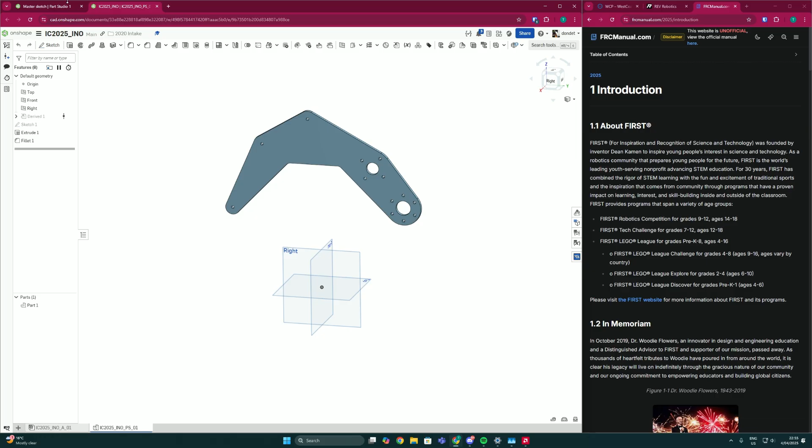Welcome back to another part of the series where we'll be designing a slapdown intake. So far, we've drawn up our master sketch showing where the points of our rollers are going to be. This one's not in the right spot because I moved it at the end of the last part, but that's okay. We also determined where our pivot point is going to be and where our rollers sit when the intake is stowed. Then we drew out the intake plate, the plate that comes out of the robot. Today we'll be drawing the plates that hold the motor that drives the pivot. Let's get right into it.

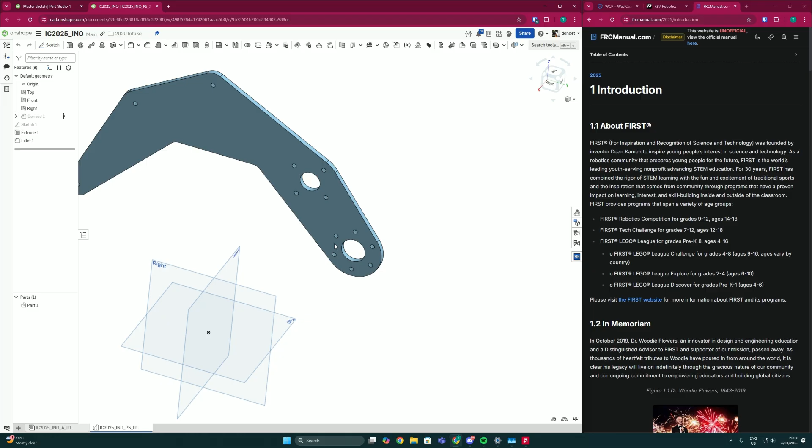The first thing I want to do is draw out my drive base, because the intake plates are going to be driven by a pivot, which is driven by a motor and gearbox mounted onto a drive base. Ideally you'd have drive base CAD where you could just throw it into your part studio, but I don't have that. If you were building a robot during the season, you'd have that, but since we're doing this for the videos, I'm not going to make a full drive base. I could, it wouldn't take too long, but I'll just show you another method that's the same.

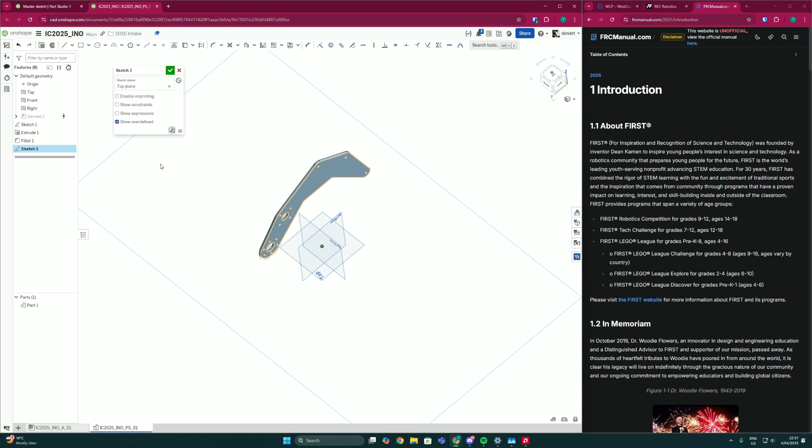So I'm going to start a sketch, and just draw up a drive base in this part studio. I'll start a sketch on the top plane. What I have here is where the plate is relative to the rest of my drive base, and I can use this sketch to base everything else off. Give me a sec. I kind of want to draw out what it's actually going to look like.

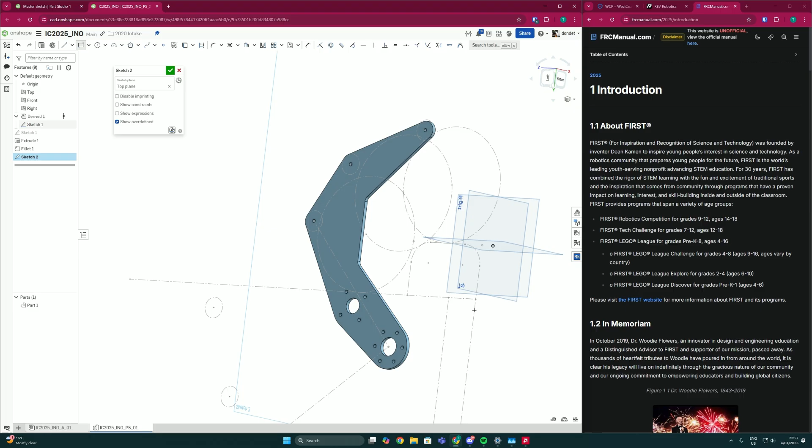Let me think about this. I'll go normal... I can't see anything now. Struggles. I'll go almost normal, and I'm going to draw a big rectangle like this. This rectangle needs to pass through that point there — it's going to be like the front rail. To make it pass through that point, I'll use the coincident constraint, doing line to a dot. Now that's constrained.

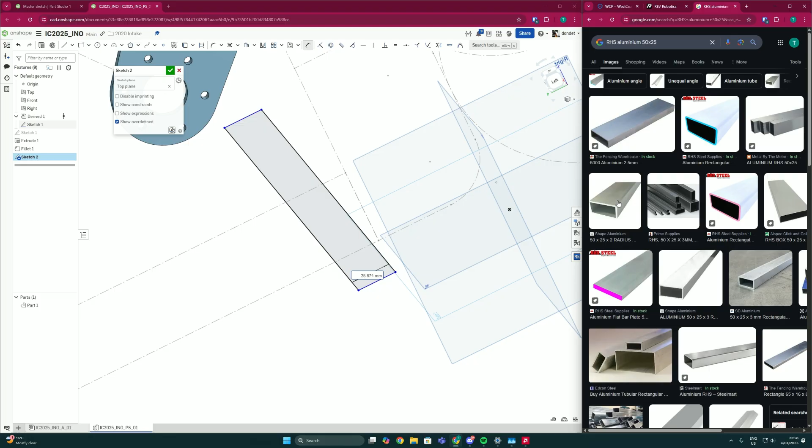Now my drive base rail is going to be rectangular hollow section, RHS aluminium, like this. It's going to be 50 by 25, by 3 millimeters thickness, but I don't really care about that — you'll see why later. It's because I'm not really interfacing with the thickness much, so I'm not going to bother to CAD it. This one doesn't really matter either, because I'll play with the sketch later. This is the distance from the edge of the rail to that plate there.

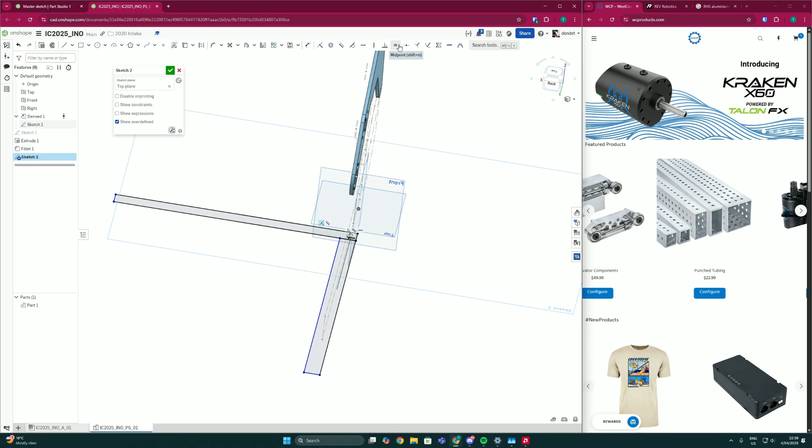I want to draw the rest of the rails, so I'll draw another rectangle, and this one's also going to be 25, so I'll make this equal to that. Now obviously I need a rail here, like every FRC robot has, so instead of drawing another rectangle, I'm just going to draw a center line at that midpoint. You can see if you hover over it, it gives you the midpoint. I'll go normal, and make that a vertical line construction, so I click Q there.

Actually, I'm back, sorry about that. I just wanted to install a program that lets me log my key presses. It shows you my key presses, like that.

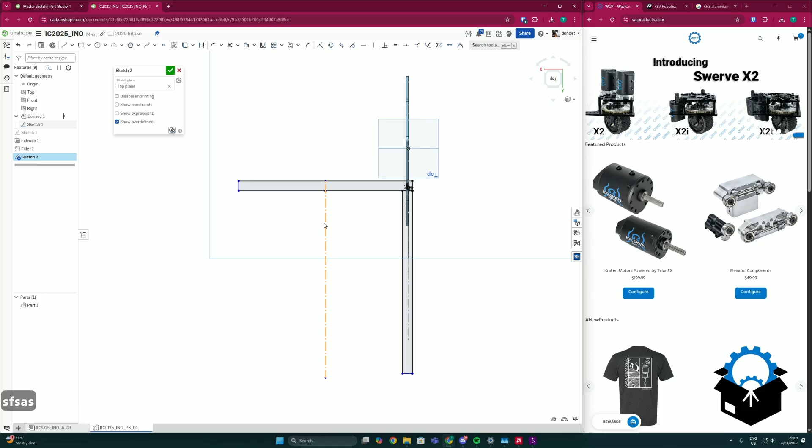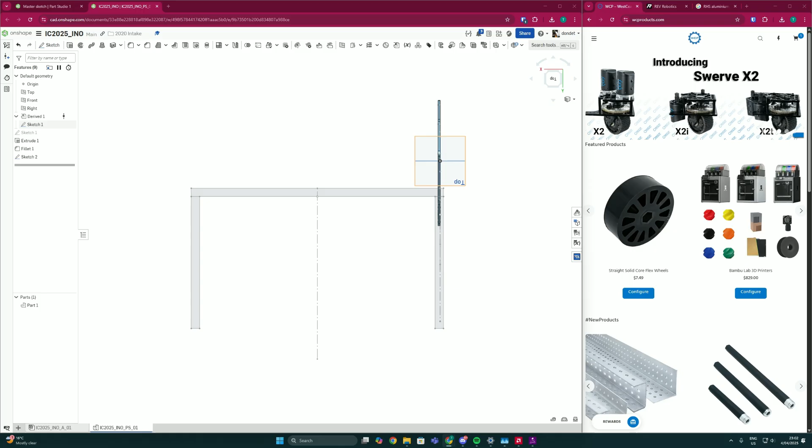So what I was trying to do is make a mirror line. Now that I've done that, I can go mirror, select the mirror line, click on this guy, select entities to be mirrored — 1, 2, 3. Usually we don't really like this blue stuff in our sketch, so I'm just going to constrain as much as I need to. I don't care as much about this blue because it's just the length of it — I'll make it sufficiently long, say 400 should be enough. This one I'll probably do 750, but it really depends robot to robot — your frame size can change. Remember we're drawing the frame out here. Once you've done that, you can extrude that guy out. Remember we said we're doing 25 by 50, so this guy is going to be 50.

Yep, oh wait, I want to do a starting offset because we said the bumpers we're going to figure out, and so is the frame. So 20... oh shit, my bad, this one's supposed to be 20.

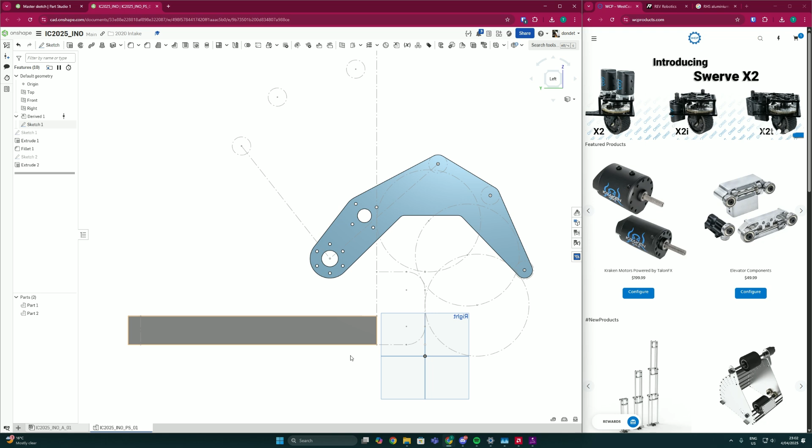Now remember that, just keep in mind your bumpers are probably not going to be this high. Your frame can be whatever height, it really depends on where your wheels are and how you've mounted your frame. But your bumpers should be as low as possible, and that gives you several advantages. One is a lower center of gravity, since your bumpers weigh something, lowering them lowers your center of gravity. You can accelerate faster because you won't tip if you accelerate quickly. Also, it's harder for game pieces and objects on the field to get stuck under your robot, so it's always best to lower your bumpers.

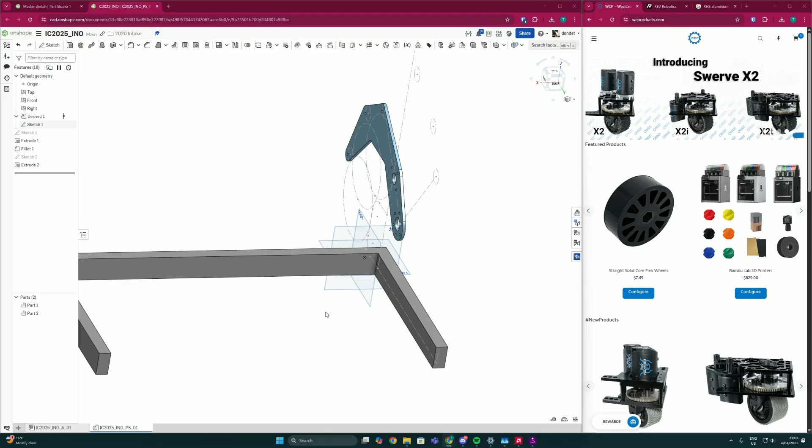Now we'll have to draw the swerve modules in the corners. So how do we know the dimensions of a swerve module? I'm going to create a new part studio and insert an MK4i, this is the swerve module we have. MK CAD... okay, MK4i, perfect.

I'll insert it, and what I'm going to do is create a sketch on top of it and find out its dimensions. I just want to know its width, length, and height, so I can do a rough sketch in my other part studio.

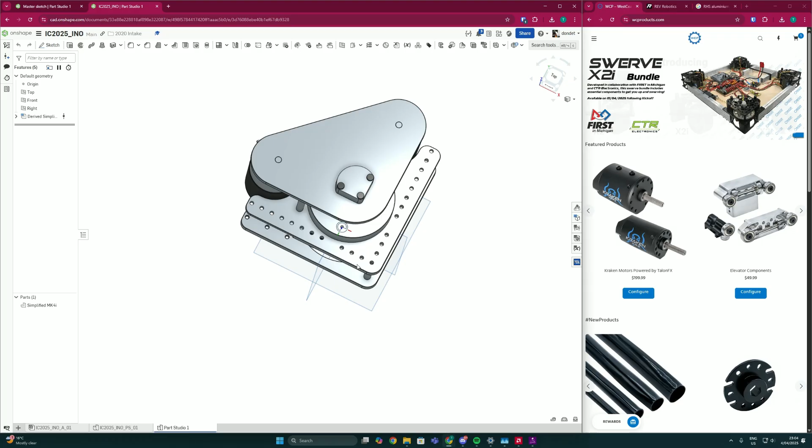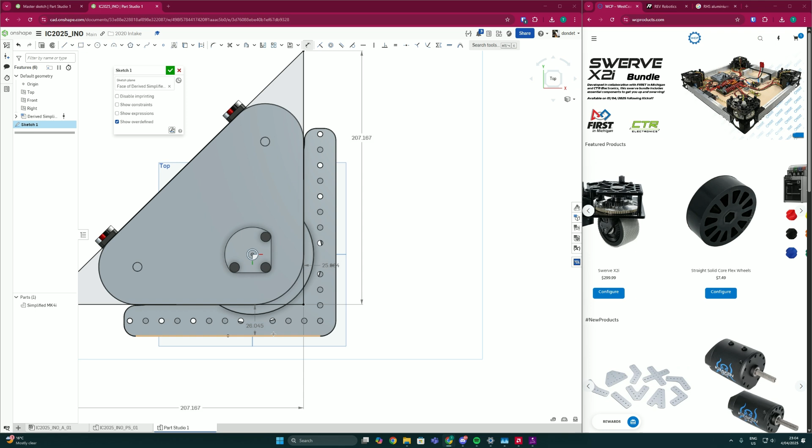So I'll start a sketch here, pairing sketch normal to the plane, like this, and like this. I'll click I for coincidence, and bang, bang. I probably also want to know this distance. I'm drawing all this so that when I have everything attached in the assembly to the intake, I can tell whether it's going to hit something, and we can move stuff around. That's why we have CAD, because we want to know if there's going to be any collisions later.

I'll just make them both 26, could be rough. So, got that. What did we say? Forgot... 207.167, okay, 207.167. So I'm going to draw a sketch on this.

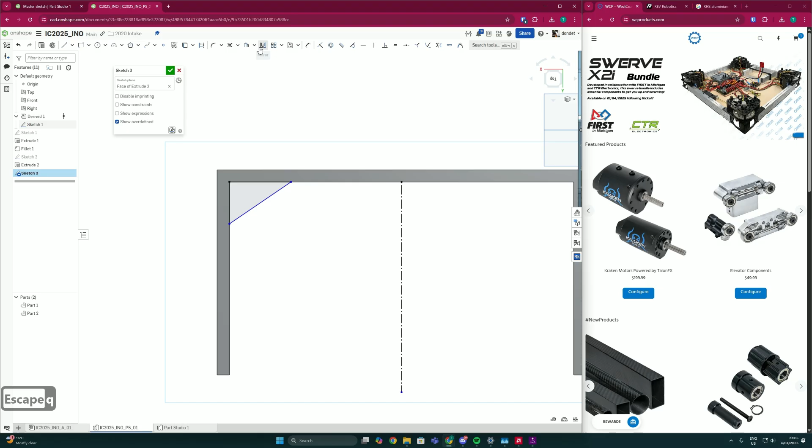Just draw a quick triangle like that, mirror line like we did before. Mirror... oh oops, select the mirror line. Bang, bang, bang, okay, and I forgot it already, 207.167. Make those two equal. Oh wait, god damn it.

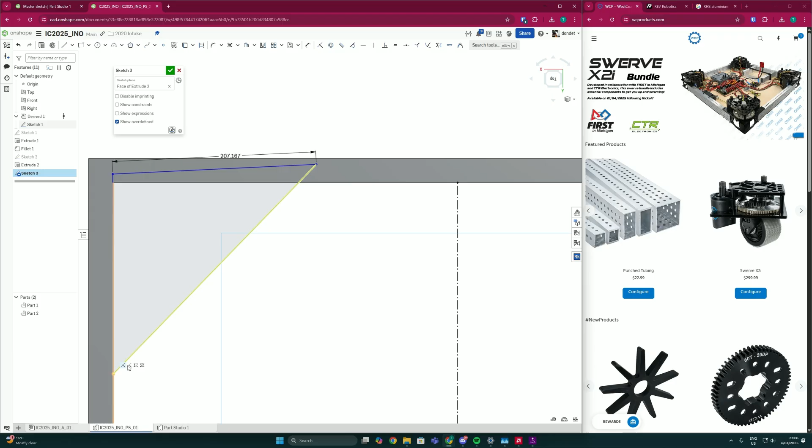That was not the correct thing to do, because I wanted to have this a little bit off the line, like there, right, same with this one. So I'm just going to delete those constraints, get that one there. Oh, that's not what I wanted to delete at all. Not what I want, okay, I'll just do this.

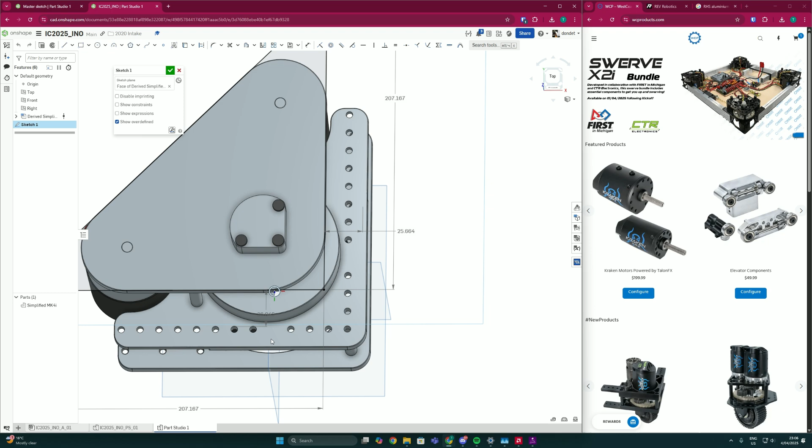Something like that, right? Make these two equal if I haven't already. I'm going to make this parallel to that, and this parallel to that. And we said this distance is 26, and this distance is 26. Is that right? I might... yeah, whatever, okay.

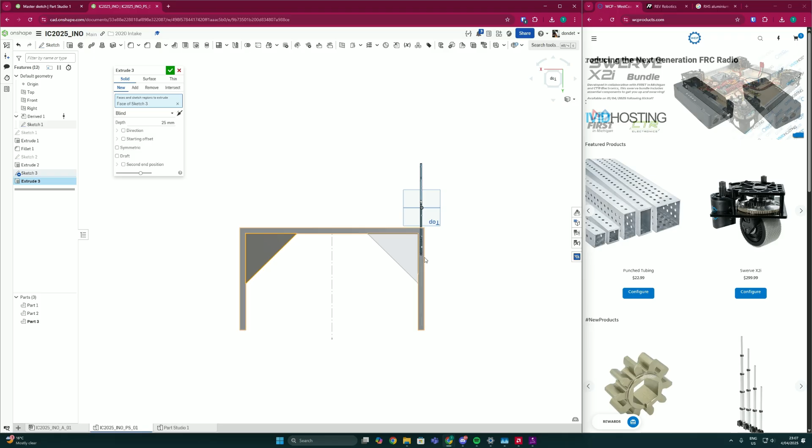Actually, I'll make it 25 so it combines with the rest of the drive base, otherwise it'd be floating, which would be a bit annoying. And then I want to know the height of it. Oops, the height of it is that, so why do I keep doing that? I'll extrude it up by that height. Now we have something that kind of represents the swerve modules, so that's good.

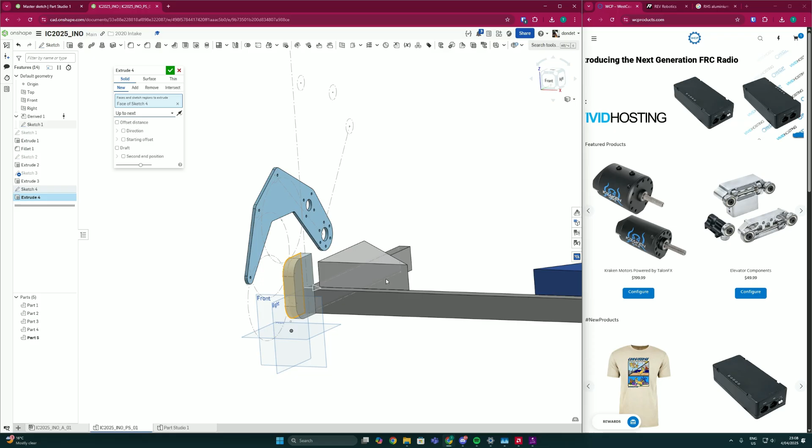Okay, now we probably want to do the bumpers. So I'll sketch this face, and I'm going to click U to project the sketch, and bring this up. This represents my bumpers, if you remember from the master sketch. I don't want to do that, I'll just draw a new line. Perfect, so then I can extrude this out all the way up to face, not up to next. I can click on this face, I'm going to make a new one. Yeah, blue bumpers, nice, looks good.

Sick, what's next? I probably want to do the holes. So in order to do the holes that are on the drive base rails that you can mount things to, they are always 12.5 mil away from any edge.

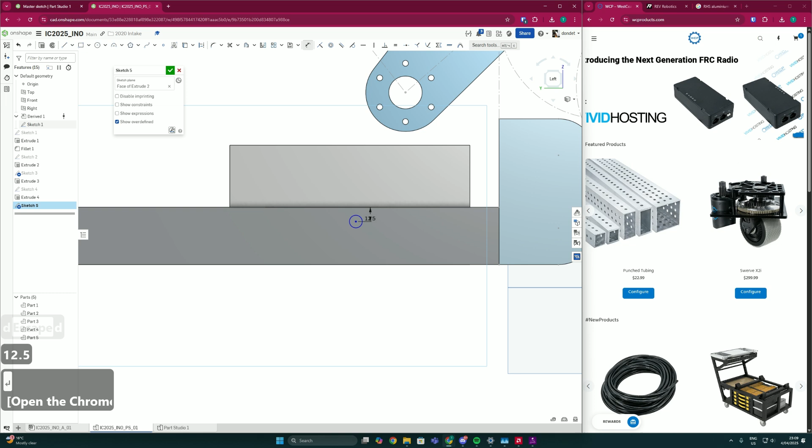There's a gap in the swerve module, right? There's not going to be any holes here in the corner. So I did write down somewhere how much that gap actually is. I've written down that it's going to be 119.8 - don't ask me how I got that number, I don't remember. You won't have to do this because you'll have the actual CAD, your real thing.

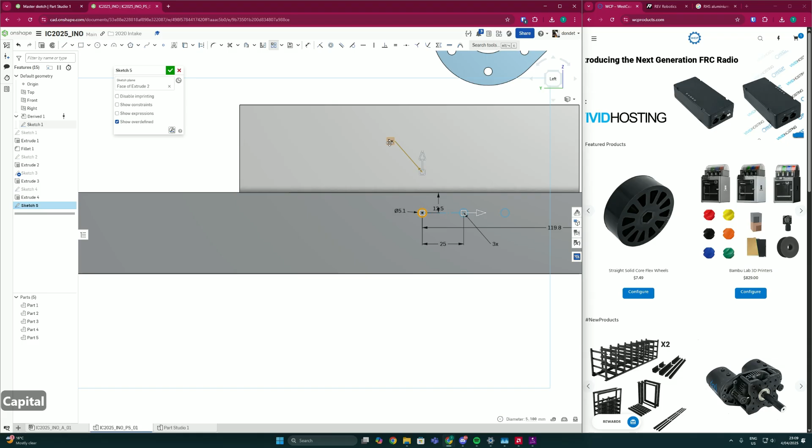Linear pattern, 3 of them. Linear pattern means you can create multiple instances of sketch entities uniformly in one or two linear directions. I'm going a bit quick because this part isn't so relevant to the intake, and I want to keep the video relatively short. But that's exactly what we want, because we want kind of like a grid of holes.

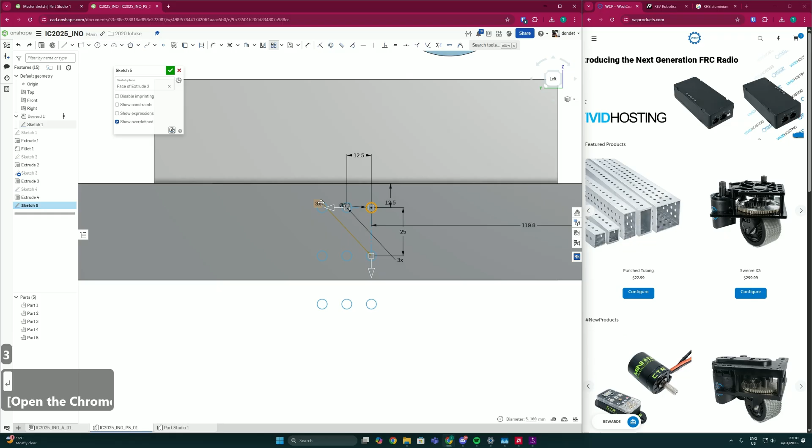We said 12.5 spacing, and I'm going to make 3 rows. I'm about to do 20 of them - is that enough? Let's go for 24. Yeah, that's probably enough.

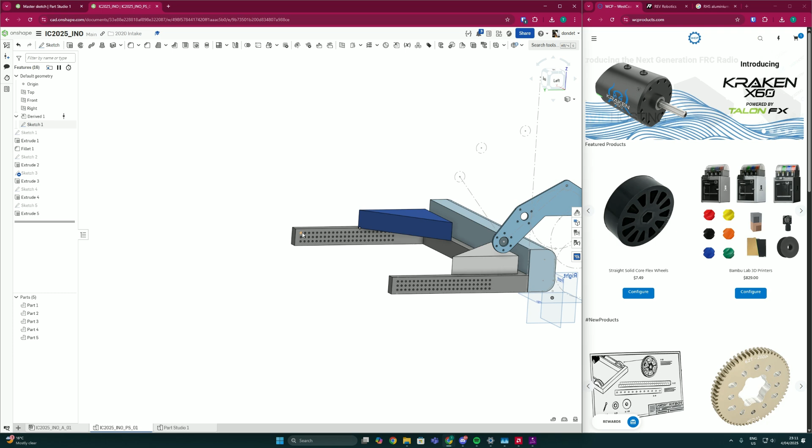I'm going to remove everything in that sketch. I can click on the sketch to select all of the faces, all of the closed contours in that sketch. And I'll do through all, so it goes all the way through the other side. So now we've got our drive base frame done up with all the holes. Kind of represents what our real drive base is almost going to look like - a very rough version of it at least.

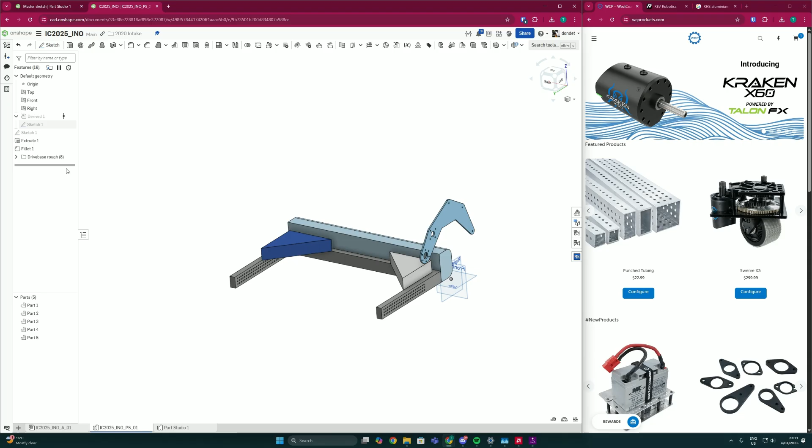Now that I've done that, I'm going to hide the sketch that's visible because I don't want to see that, and I'm also going to put anything related to the drive base into a folder. So anything up until sketch 2 - I just held down shift to select them all. I'll call it drive base rough. You can click add sketch to folder and add them to a folder like that. So now it's much more clean here for things I probably won't ever touch again.

So now what I will do is start the sketch of the pivot plate, the plate that drives my gearbox - I mean my pivot, the gearbox that drives my pivot. I started a sketch on this face because it's going to be directly mounted to that box tube, and I'm going to click N to go normal.

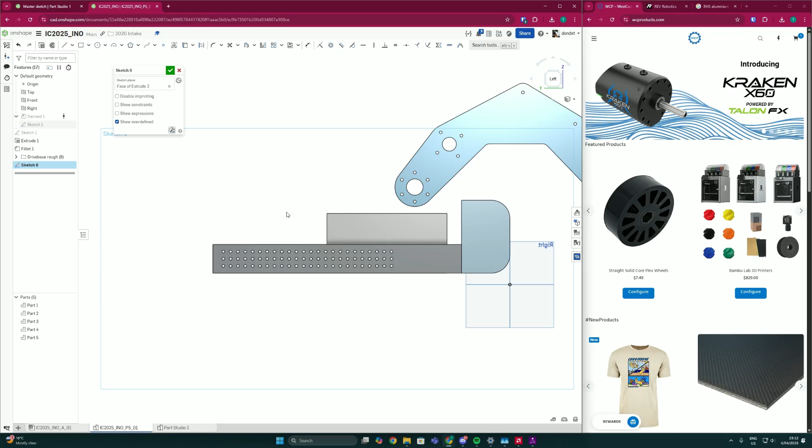Like we did with the intake, we need to figure out where all of our holes need to be before we sketch the perimeter of this gearbox plate. So the first thing we need to do is find out what the ratio of our gearbox is going to be that will drive this pivot. The way we do that is we go into Recalc - we love Recalc, and Recalc has an arm calculator. So we'll go to here. We'll be driving it with one Neo Vortex.

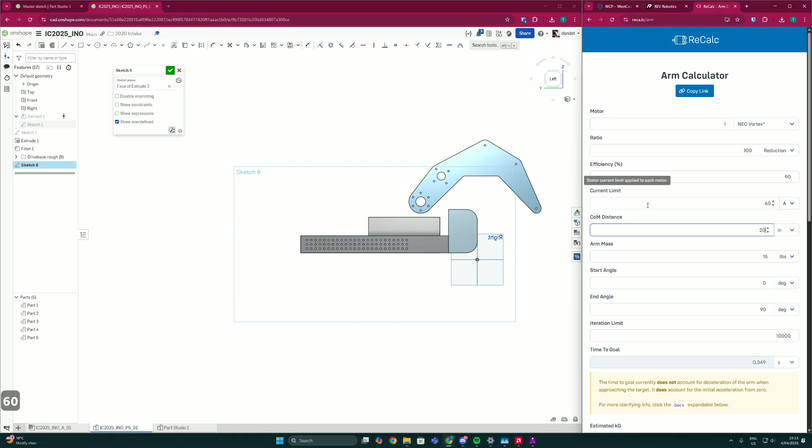Typically all you need. The ratio we don't know just yet, so I'm going to leave this for now. The efficiency - well, the more gears and pulleys and chains you have, the more your efficiency goes down, because there's no energy transfer that's actually 100% efficient. This isn't realistic, so I'm going to put this at 90 to compensate for any energy loss, such as loss to friction, to sound in our gears and chain. Our current limit, I think we can up that a bit to 60 amps. We can talk about how you decide on a current limit in a future day - I'm not going to get into that now.

My center of mass distance - in order to figure out whether the motor can drive this arm, you need to know how heavy the arm is going to be and where that mass is centrally located. So the first thing I'm going to do is go to metric, kilogram, and I'm probably just going to want to calculate the distance between these two holes.

What do you mean? That's kind of annoying. Okay, the center distance is 333. Now that's not actually going to be the real center distance, because what I'm really looking for is where the center of mass of the whole intake is. If you think about all the wheels and pulleys, it's probably going to be somewhere around here. We can only really know once we've assembled it, but there are functions in CAD you can use to check around where the center of mass is going to be. It's not 100% accurate because there's other stuff you add on, but it's pretty good for a rough sense. Regardless, because the motor is back here, it's going to pull it back a bit.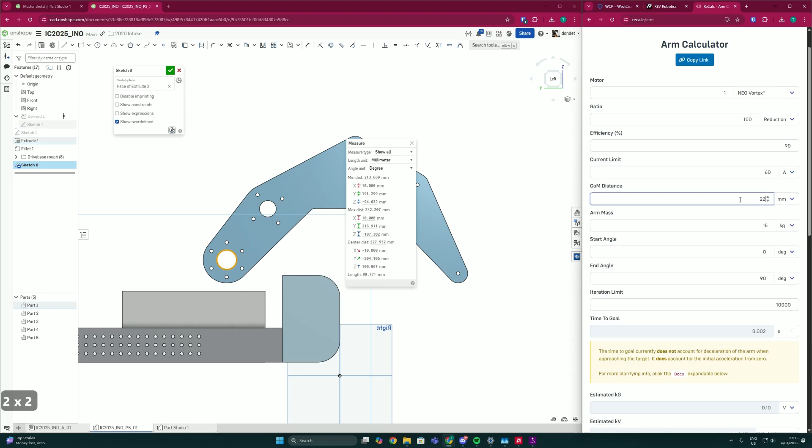I'm going to just put the center of mass there for now. Actually, let me click on these instead. Min distance, that's not really what I want. I want the center distance, 227... 228 actually. My arm mass, I don't know exactly, you can kind of figure this out in CAD to get a rough value, but I'm just going to go for 3 kilos.

Now that I've got that, I need to know how much I'm swinging, so that's what we made our master sketch for. We found this dimension, which is 85.831. So we'll put this in.

85.831. And now I'm just going to bring this down, and as you can see, as you bring it down, the speed goes up. So I'm going to try 50. Speed's at 0.18. At some point you bottom out and reach kind of a minimum time.

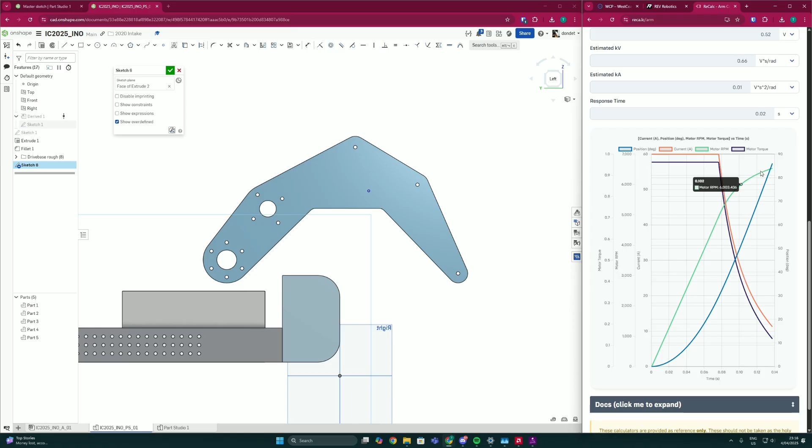If we look at our graph, we'll be pulling 60 amps for about 0.08 seconds, and then it'll have reached... is it reaching max speed, or is it just, okay, don't worry about it. Regardless, we're going to go for a 40 to 1 reduction. That seems good, I'm going to delete that point. So with a 40 to 1 reduction, we should get the intake coming in and out in 0.13 seconds. I think that's fast enough, should be fast enough. If it's not, we can have a look at it once we've built it.

But let's talk about how we're going to get that reduction. Right now we're using chain to drive that pulley, that pivot. I think I mentioned that in the last video, and the reason we use chain is because it's very good at shock loading, in the sense that this intake is sitting outside of the robot. It can hit the field wall, it can hit other robots, there's a truss that's always somewhere on the field, and if it hits that, it's going to send a shock.

It's going to try to push the intake, move it, put it back into the robot, which could be fine, but if your motor is applying a torque to keep it in that position, that's going to push against the intake hitting into the wall. Because of that, you could end up, for example, if you have a gear driving that pivot, shearing that gear tooth. The gear tooth could break, which is why we use chain, because it's good for shock loads.

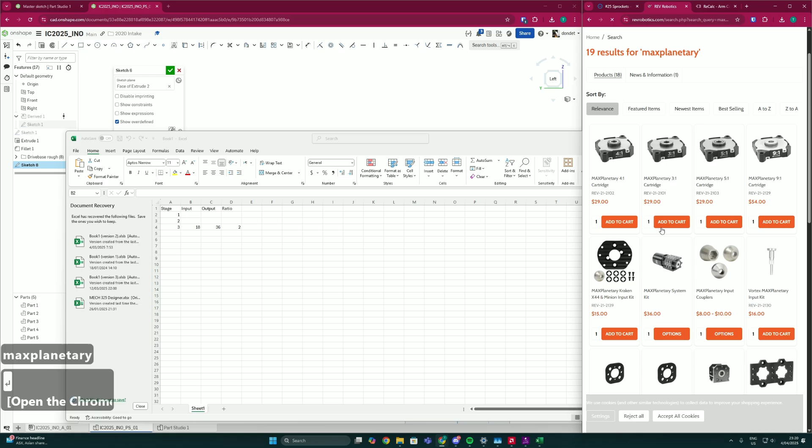So let's use a MAXPlanetary as the input. That's just a planetary gearbox, all packaged up nicely for us. They're really nice to use. I would avoid it if you're looking at some very low backlash solutions, because there's no way you can adjust the backlash inside of this gear cartridge, right? Whereas with a gear that you put on a shaft, you can do multiple things. You can seal it up, you can put retaining compound on it, which is almost like a glue to fill up holes, which should get rid of backlash. You can also put a steel shim in it to shim the shaft between the gear, and that kind of gets rid of the gap, because all our gears are designed to just slide onto shafts. They're not toleranced to be pressed on. They can still move around the shaft, and that brings in backlash. So by putting in the retaining compound or putting in the shim, you remove that backlash, but you can't do that with a gearbox like this. So if you want to make an arm that needs to have really zero backlash, because you need to go to multiple positions, I would try to avoid using this, but otherwise it's quite good.

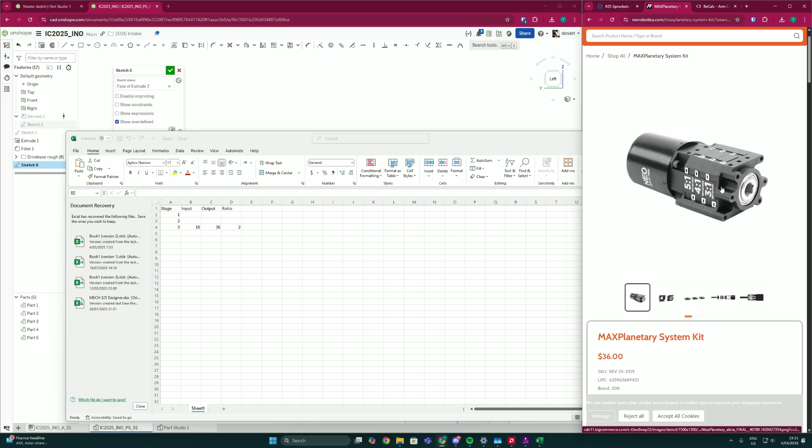So with that, we've got these options for the ratios for the cartridges, right? So ratio here is this divided by that. So the total ratio is going to be this times this times this, right? So right now we have a 10, and we want a 40, so we kind of need a 4 to 1, sorry. So let's say I'm going to use, I'll show you here.

Okay. We need a small gear, we need a big gear. I wouldn't use anything under 22 - wait, that was 3/8. I wouldn't use anything under 20 because this has a high likelihood of shearing. We've had them shear in the past, just from normal use.

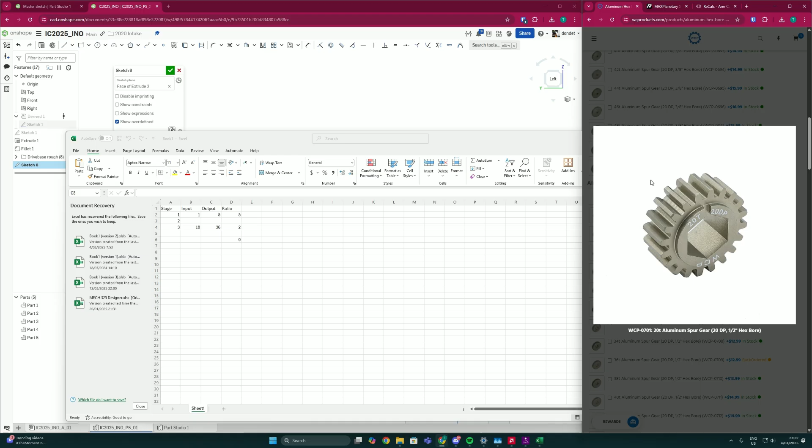Let's go for 20. The smaller the gear, the more likely it might shear. If it does shear, you could add an extra gear, so you have double the surface area, or go to a bigger gear, or go to a steel gear, which I don't think they sell. Oh wait, they do. You could go to a steel gear, but it's more heavy, which is why we tend not to use them, right?

Yeah, like this one here. If you did go steel, you could probably even go for a smaller gear because it's a lot stronger than aluminium. Aluminium is just light, which is why we like to use it.

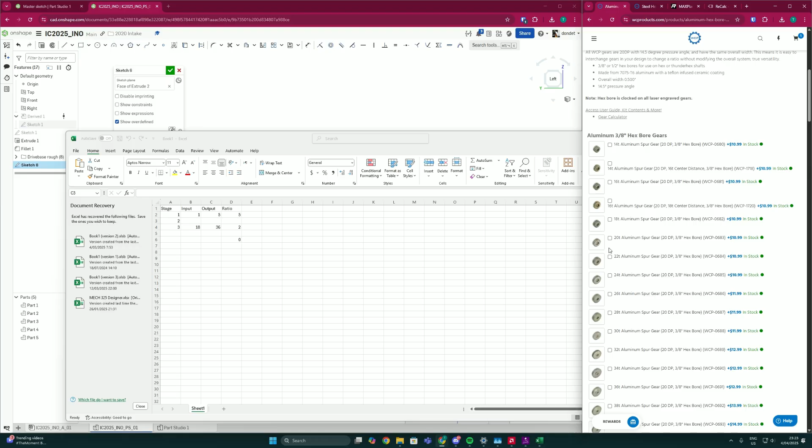So we have 20, and then in order to have a 4:1 ratio there, we probably want... that's an 80 tooth. Don't like it, it's a bit big. So what I'll do, go back here.

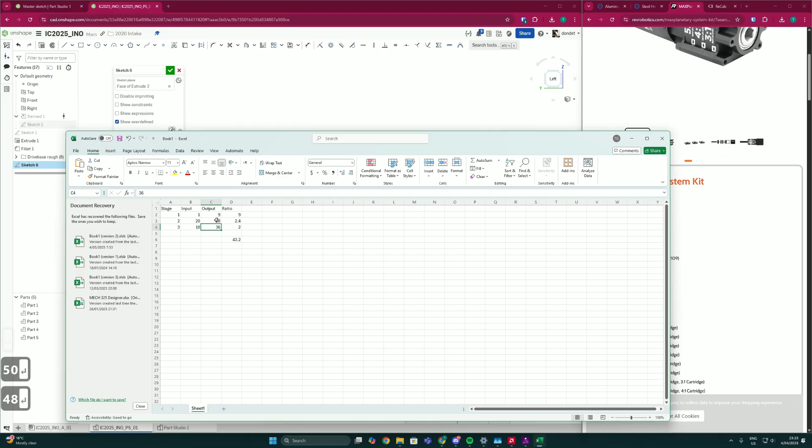We could go for a 9:1, right? Now we have an 18. This divided by this, so yeah it's too much, but we can go to like 50 maybe. Too much - 48, 46, 44. Yeah, that's pretty close to what we want. I'm happy with that. If we put that into ReCalc, 39.6.

Great, so I'm going to copy that and pop that in here, just for future reference if I ever need to look at it.

So that's good. Now we can start to draw up all the holes. Okay.

So first thing we probably want to do is project the holes that we know are going to show up in this plate into our existing sketch. So that hole isn't really going to show up, but there is a bolt that's going to go into here, so we can use that. And I'm going to make that a construction line. Yeah, and...

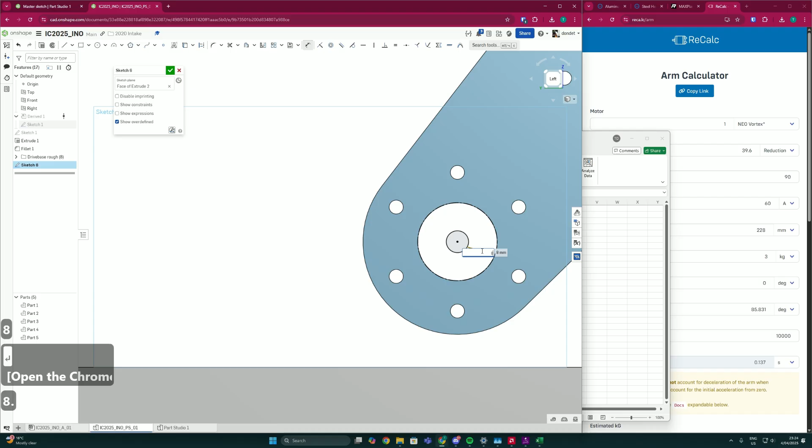I'll put a hole here. Let's make that an 8mm bolt, 8.1 - sorry, because it's clearance. It's going to be a bolt that goes into a hex shaft, and that hex shaft is going to spin in a bearing. Because the sprockets have a bearing size hole. You'll see later.

Yeah, and then what we want is something that represents the 18 tooth sprocket - this guy over here. Now, like we did before, we can go back into... I'll go to this one. We can go back into the sprocket drawings and figure out what the diameter of the sprocket is going to be with the chain, and we can draw that up just so we have a reference diameter that we can avoid.

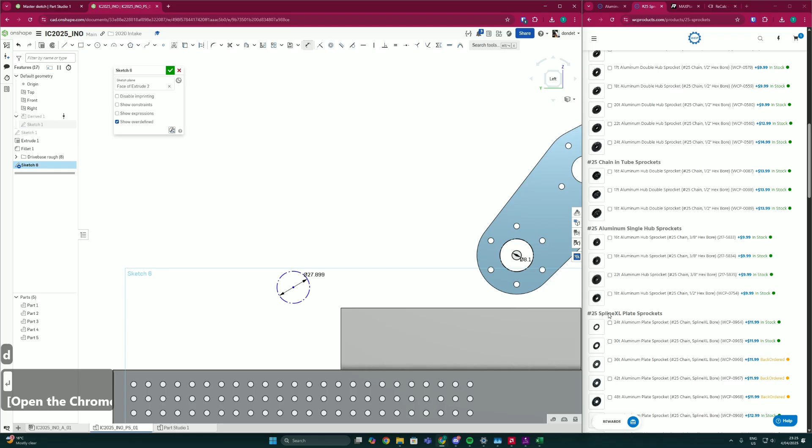Yeah, good enough, I just want the reference diameter. So an 18 tooth has that reference diameter in inches. Yep, so that's cool.

It's going to sit like here, and then we need a bearing bore because that sprocket has a hex hole, so we need kind of like a hex bearing in our plate. It's actually going to be a hole, so we're not going to make that a construction line like we did the other ones.

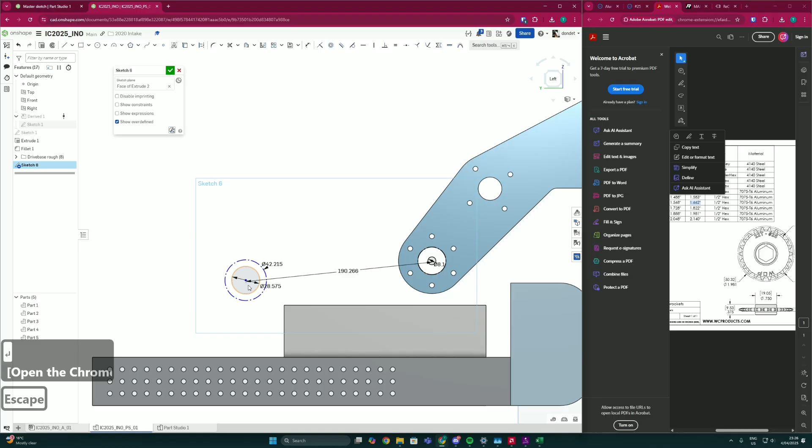This distance here is going to be defined by the number of chain links that we need. The way that you do that is you position this guy around where you want him - so let's say there, and dimension it like that, right?

Now what we can do is we can go into recalc, chain calculator, chain type 25, my desired center in millimeters - it looks like 190.266. I've got an 18 tooth to a 36... so it's suggesting either I can use 86 chain links or I can use 88 chain links.

I'm gonna go with - if I come closer, I'm getting pretty close to the Swerve drive, and I kind of want to avoid it. So I'm gonna go to 192.8175, just to clear the Swerve a little bit more.

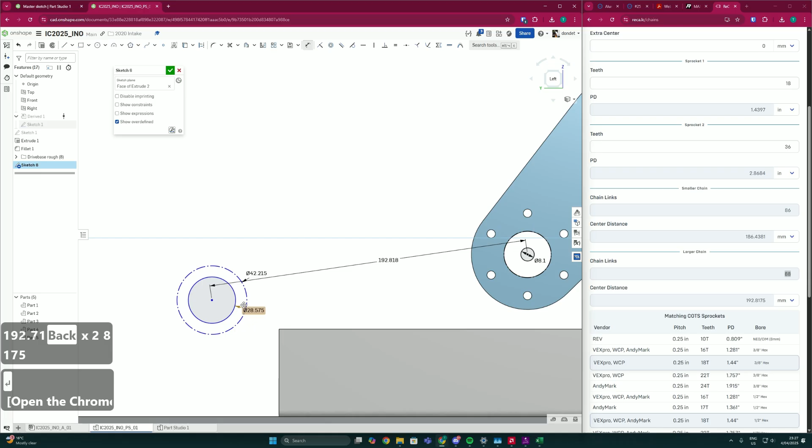And then I guess, yeah, you could draw the chain. We'll see whether we need it later. I'm not so sure. Actually, I'll draw it, why not? Just as a reference, in case we might be able to catch something colliding with the chain in the sketch and fix it up. So I'll make this tangent.

And coincident. Okay.

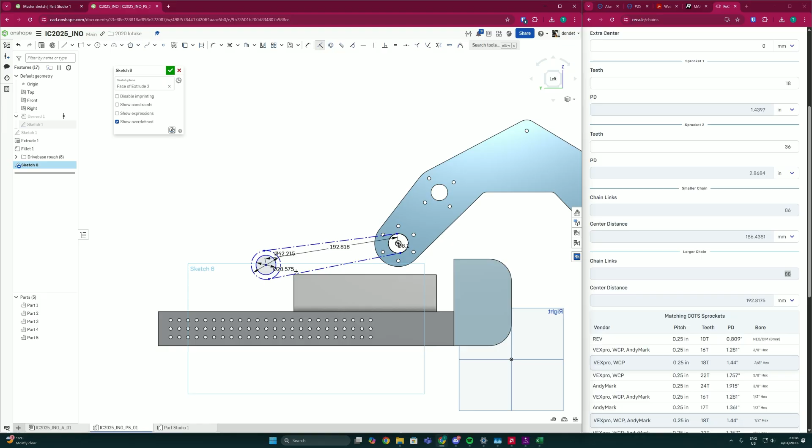Now that I've done that, I can draw where the gear is going to go. So I've got a big gear here. Remember, we have the 44 tooth.

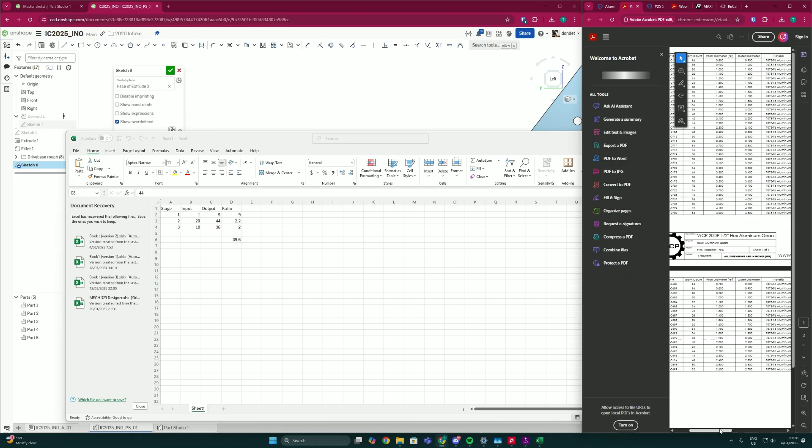Next, there is a formula for knowing the outer diameter of the gear, because we're going to use this as a reference again, so that when we draw stuff, it won't collide with the gear. But if you don't remember the formula, you can always check here. What did we say? It was 44. A 44 tooth gear has a 2.3 inch outer diameter.

So the formula for that is 44 tooth divided by 20, plus 0.1, all in inches. Keep in mind we are using the 20 DP gear - this guy, 20 DP. That just defines how big the teeth are, but pretty much all of our gears are 20 DP. So that's that.

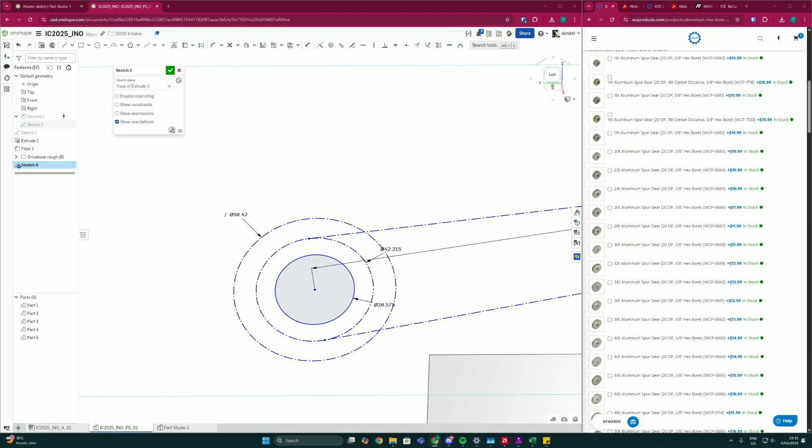Is that right? Yep, cool. And then the other gear is 20 tooth. So I'm going to do the same thing: 20 divided by 20 inches plus 0.1 inch.

That's just the outer diameter of the two gears. I can set their distance using this formula: the sum of the gears in inches divided by 2, times 20 inches, plus 0.001 for clearance. Oh, what is it angry about? Cannot add area and a length. What?

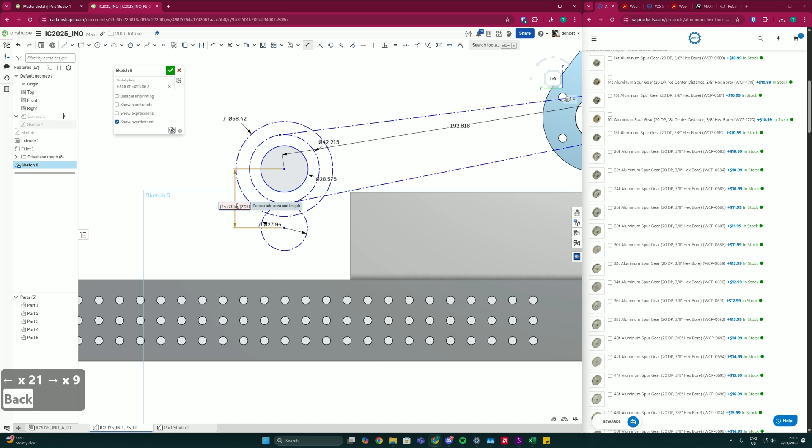Okay, like that. So those gears are going to mesh now at that center distance. I'll probably want a bearing there as well. 5 inches. Yeah, okay.

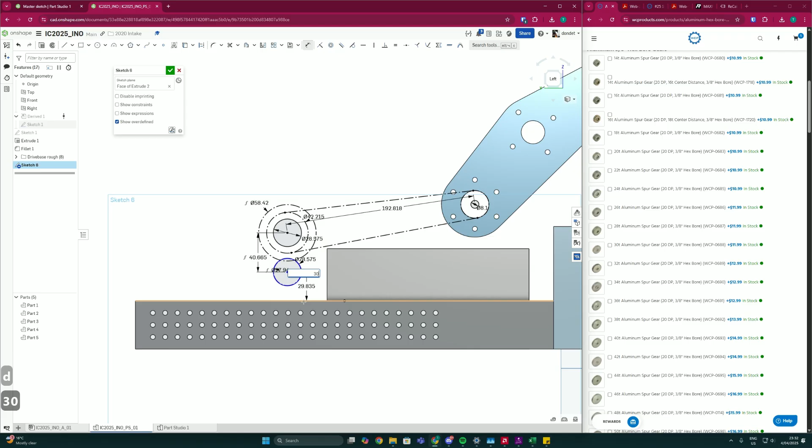Then what I will do is set the height of this so that it won't hit the box tube. 30, I guess. What are you mad about?

Oh right, and I can set the position of this guy. I'll just make these two vertical with V - this guy. So now they're in line vertically.

What I would never recommend doing here is constraining like this to a specific hole, because if we were to move stuff around and it's constrained to a specific hole, that's going to mess with stuff. You know, if we're constrained horizontally to like that, I guess that would be a good example.

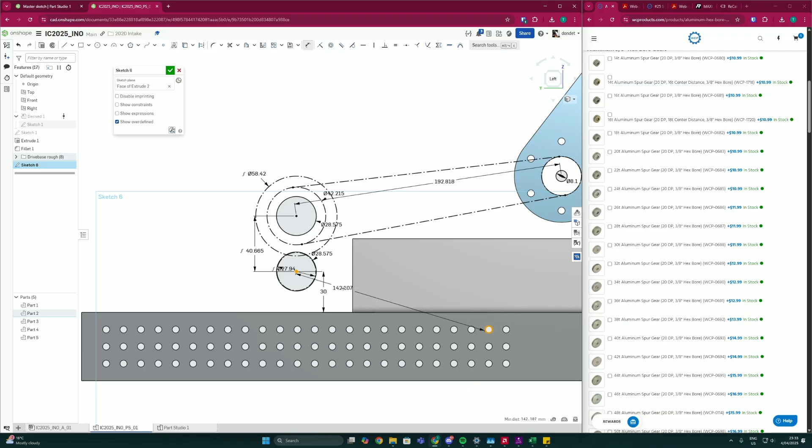It's now constrained 142 mil from that hole. But if, in our master sketch, we move something around and pushed it back, it's still going to be constrained 142 mil to that hole. So it doesn't really make it compatible to edit later. So I would only really constrain to the top face of this.

Yeah. So now I think what I will do is draw the holes for the max planetary. He looks like this - we can mount with these 4 holes. We just need to figure out where they are.

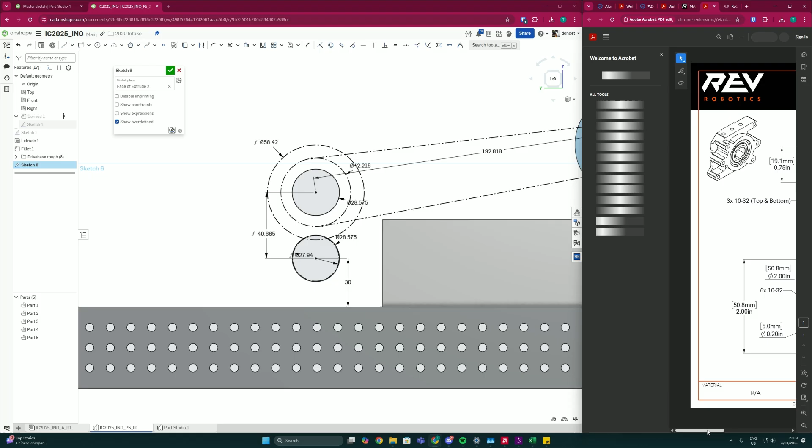How do we figure out where they are? We can go to the output hex socket drawing. Perfect, so they are - no, not good, let's go to the system drawing. Ah perfect, there's 4 10-32 holes, which are those guys, and they are 45 degrees offset.

So what I'll do - maybe there's a better way to do this, I'm not so sure, but I'll do it this way - they're on a 2-inch bolt circle, as expressed by this drawing, this dimension right here. So put that on a 2-inch bolt circle, construction line. Love our construction lines. And I'm going to do 10-32, we said that's the equivalent of like M5, but this is going to be an access hole for the bolt head.

So I'm not going to - what was I saying - I'm not going to make it 10-32. I want to make it bigger, big enough for maybe even a bolt, but an Allen key at least, right?

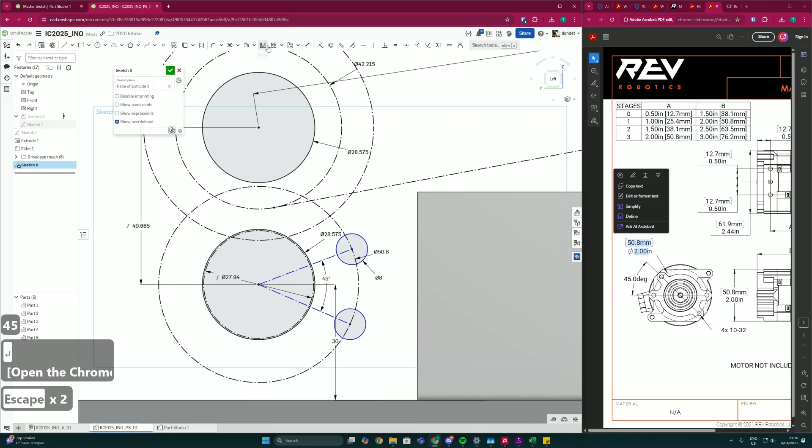And draw a line to there and a line to there. They can be construction lines, but they are definitely going to be 45 degrees apart. Then I can do - I'll just mirror them, put a line like that, why not? Mirror line, like that. So now I've kind of like...

Oh, that was a bad idea. Don't do that mirror line, because that's only correct in a single position. Instead, what I will do is a circular pattern. And I'm going to click on those 2 holes, and I'm going to move my pivot point here. My number of instances are going to be 2, and now I've got that right. And now this will spin around, and they're all correct.

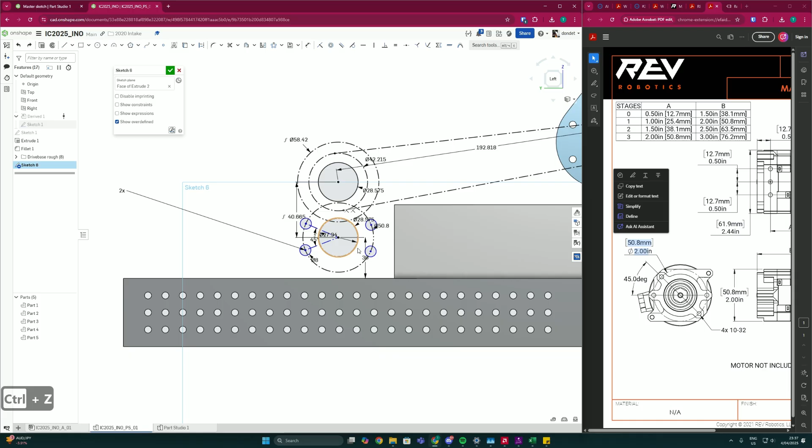I can mount this motor in any of these orientations, but there's only one real correct orientation, and that's this one here. Why do you ask? Because if I was to put it here, you can see we drew the gear before, right?

And now if the bolts are here, those access holes are doing nothing. The Allen key, when you put it through the hole, it's just going to hit the gear. So I want it to clear the gear. I want it to clear, yeah.

So I'm going to put it here. It's blue, which I don't like, so instead of drawing a horizontal line, I'm just going to make these 2 holes, these 2 points, horizontal. So you click H, bang, bang. Nice, sick.

The next thing I'll do is pick out where these standoffs are going to sit. There's going to be a plate behind this that holds the gearbox. I guess I didn't actually state that explicitly, sorry about that, but pretty much it's going to be a plate behind this that holds the gearbox.

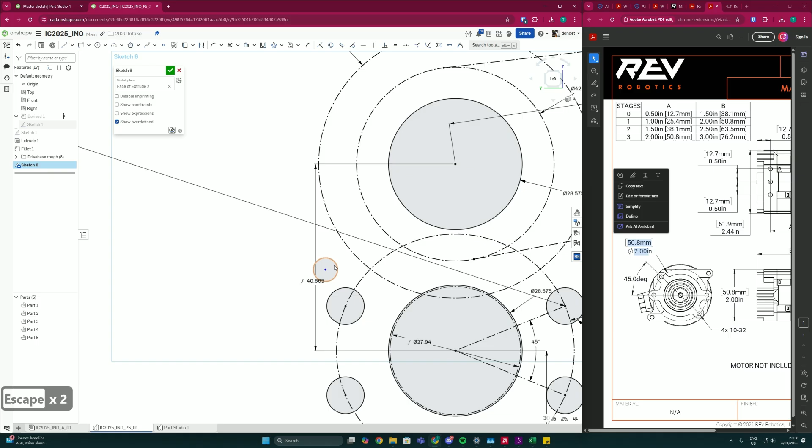And we need to support it somehow. It's going to be mounted to this drivebase rail, but we need to support it in other ways if we can. So it's going to be a hole for it - actually, I'll leave that for now. That's going to sit there, for example. It's going to be an M5 hole, and it's going to sit on a spacer. A spacer is going to space them out.

Construction line. And that spacer is going to be 10 mil diameter. It's going to sit like this. Now we need to actually determine the position of it.

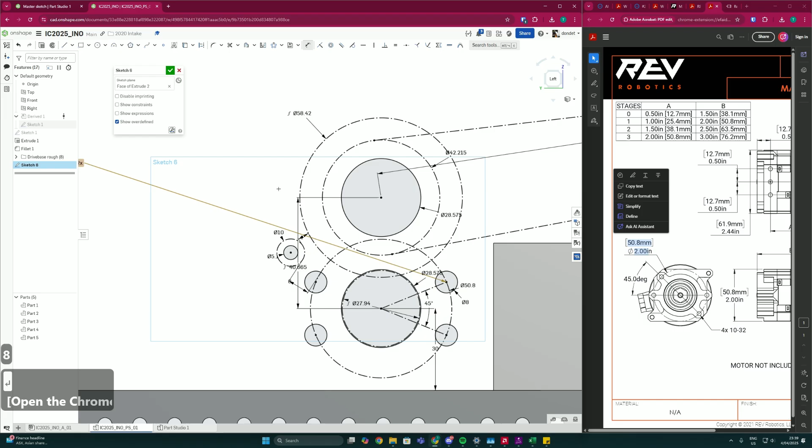So that spacer, I guess we don't want it to hit the gear, this gear here, so I'm gonna put it 4 mil away. And we also needed to clear the gearbox, and I could try to figure out where everything on the gearbox is and do this in the sketch, but honestly I'm too lazy for that. So I'm gonna make this 8 mil now, and then when I put it all in the assembly I can actually check, is this gonna hit? That's why we CAD, as we said before.

I'm gonna do 2 spacers, so I'm just gonna put a vertical line here and mirror that spacer over, just like that. So you can see, that's why we drew the chain actually. Spacer is hitting chain. Not good, right? Oops. Not good, not good.

Let's increase this guy. Perfect. Now the chain will clear the spacer. Everyone's happy. And yeah, is there anything else that I want to draw?

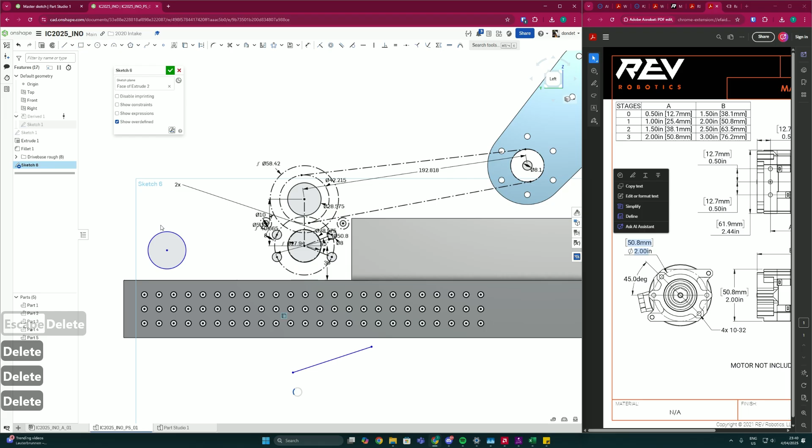I'm gonna pick up these holes. Why do I pick up all of these holes, you may ask? It's because if I was to select a few holes that aligned with my current state of my plate, it would be fine, except if I was to go and move the position of this, my CAD will go all red, because it thinks, for example, that I'm only using these holes that I've drawn in my perimeter here. But then if I move these circles to be way out here, they're really very far apart, right? So what I'll do is I'll only actually decide which holes I'm going to use after I've fully done the CAD, and I'm happy with the positioning of everything, just to make my life easier in the future if I need to make adjustments.

So now that I've done that, I suppose I can start to draw out the perimeter. So like we did before, we get our friendly center point arc, and we just start drawing arcs around stuff that we want to make the perimeter. Bang, bang, bang, just like that. Yeah. You know, you could do it on these holes, but like I said, I don't really want to pick a hole right now. It's not a good idea.

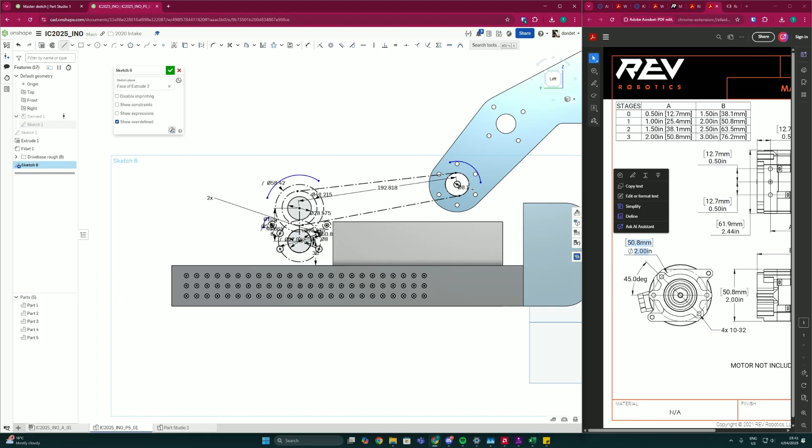So now I will start to draw the perimeter. So that one connects to there. That one, just making sure I don't do those magnet constraints. Can get annoying later, it's not what you wanted. I'll do them manually if I want to in the future.

This magnet constraint is fine because I do want this line to be parallel up to here. The reason I didn't make it coincident with this line, these 2 lines collinear, is because I just want to save weight. I don't see a point in this being that thick. There's no point. I'll put it up here.

Up here, I'm actually going to make my perimeter a bit weird. I'm going to make it like this, and we'll see why in the very near future. It's a surprise. Then I want to fix up my perimeter, right? So I'm just going to make everything tangent. Click T. Bang, bang.

Is that everything? Yep.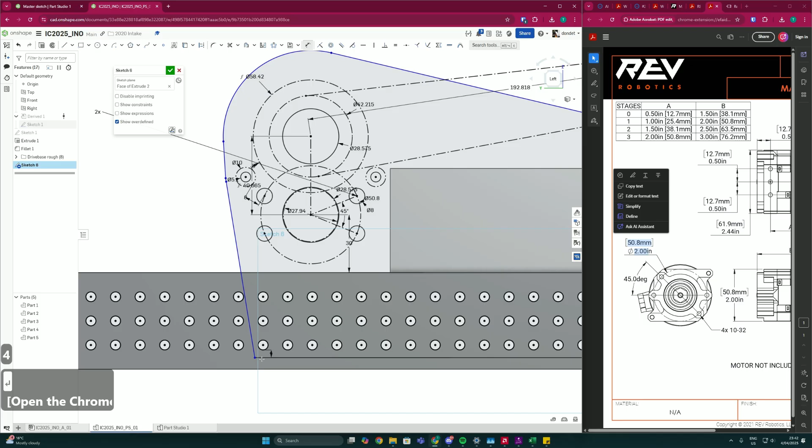I'm gonna make this 4 mil away. It's fine to dimension to a specific circle, because it's just a distance away. Like if it was to move to the side, it would still be 4 mil vertical away. That's absolutely fine.

What's going on here? I'm just trying to see what's allowed to move in this CAD. Oh, of course. This isn't actually dimensioning this distance. This is the thickness of the edge of the plate away from...

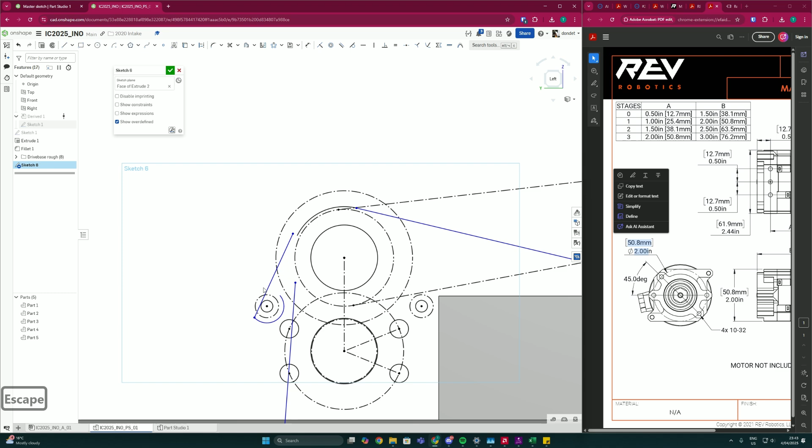Oh god, so that was bad. Let's start again. Draw that. Okay, that was not fun, right? I'm gonna delete this and do that all again.

This is gonna be 8 mil. This is the distance, the thickness between the bearing bore and the edge of the plate. This will come out to here.

And I'll do tangent again. Those two on tangent, same kind of deal. Actually, what I'll do here is make this and this tangent. Then I just want to finish it up, so I don't know. This can be...

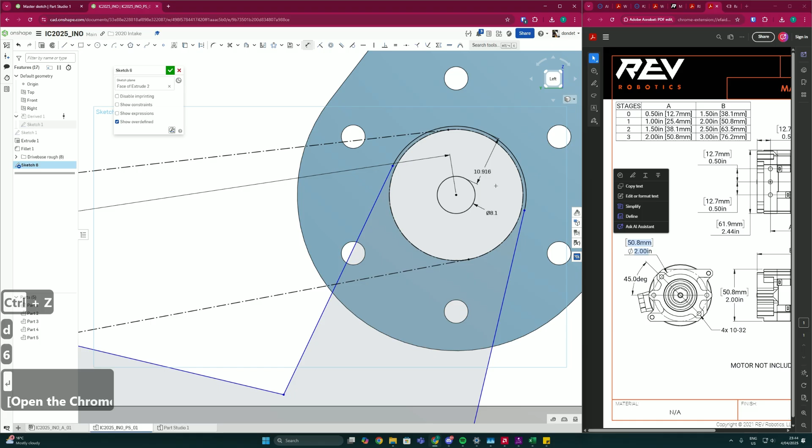Oops, that was supposed to be a distance. This can be 6 mil away, just whatever looks good later. Can modify that if I want to.

Make that 100, sure. And I guess I can also make this one 100. These are just random numbers. Like I said in the last video, I always want these to be numbers that mean something, but right now I just can't think of anything.

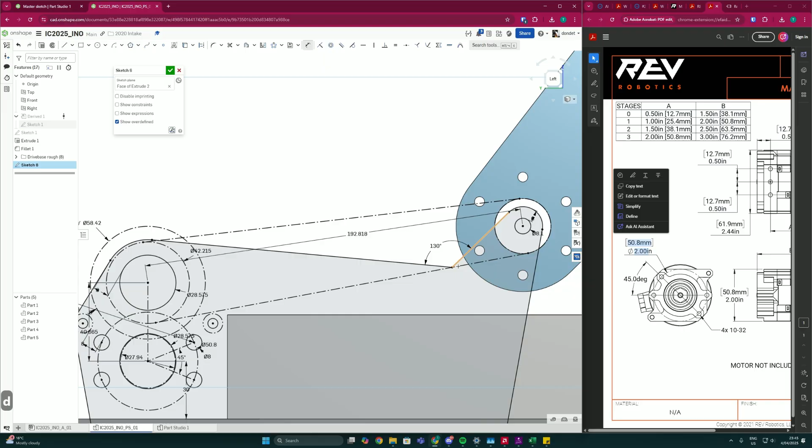Make this 130, I don't know. What else does it need? I guess I can... oh, I don't want that, it constrained that dot to the line. 45. Yeah, sick. So now I can extrude that out.

That and that. It's going to be a 6 mil plate. Perfect.

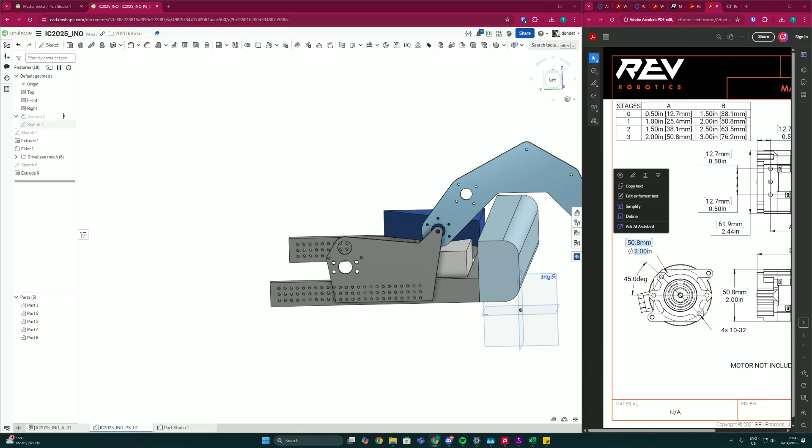Okay, so now what I'm gonna do is draw the plate that mounts the Max Planetary. So in order to do that, I'm gonna start a sketch on this face, and I'm gonna pick up the holes that I need.

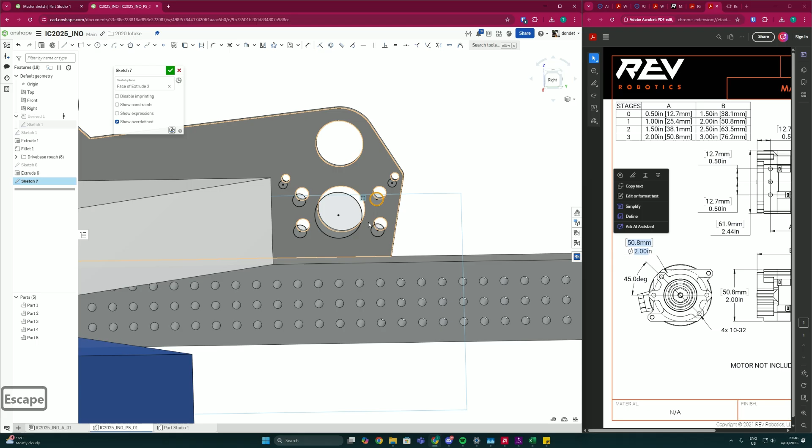So I definitely need this hole. I need the positions of the Max Planetary bolts and spacers to the plate. These are going to be construction lines. Yeah, I think that's about it.

Oh wait, I need this one here too, which is going to be a hex that runs all the way across, and I'm just going to use this as a bearing to support it. So now that I've done that, I can start the sketch around that.

Like we've done so many times now, just sketch the arcs around the perimeter, right? Bang, bang. Okay, oops, that's not what I wanted.

Don't even know how I pressed that. Draw the perimeter. Wait, I said before I don't want it to touch the bottom of the rail. Something like that. And make those tangent.

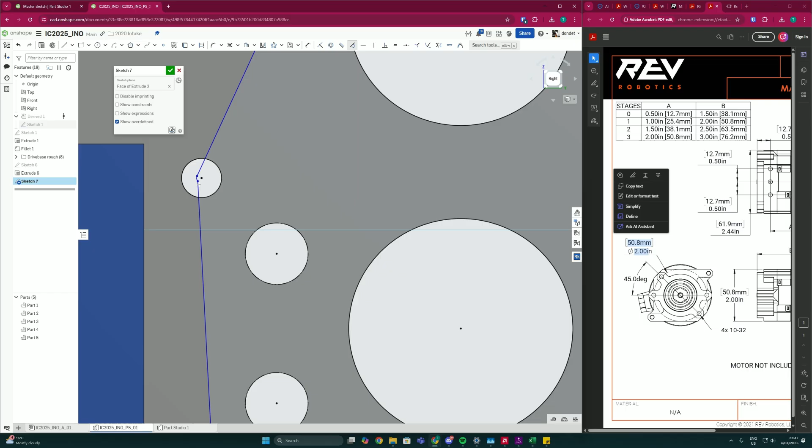So I make these two arcs equal, give us a little symmetry in our lives. It's not quite what I meant.

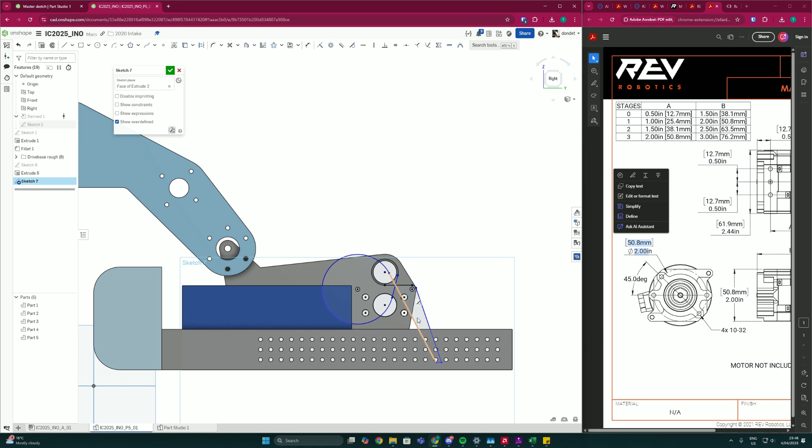Oops, let's dimension this to be... so I'll just dimension this to be 10 mil. No, sorry, I want to make this the size of this arc. Oh, what is going on? It's not what I wanted at all. Let's just delete this for now.

Make this equal to that. Yeah, makes sense I guess, I was doing that. Oh god, what are you doing?

Hey, that's not what I said. Is that what I said? Sorry, let's start again.

Oh right, see how I can't press on this line here? It's kind of hard to. You can press on this button, and you can press on all of them.

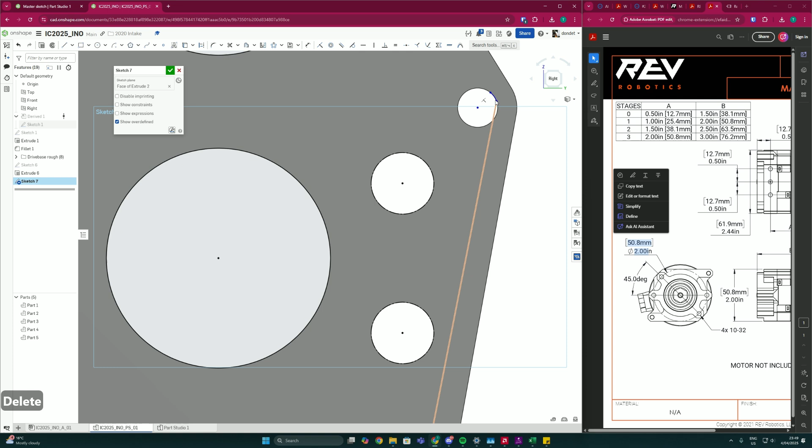Oh god. Okay, this is way too weird. Okay, sorry about that.

Let's do that again. Use construction... no, not a construction line. Center point arc from there to there, and make it equal to that guy.

Yeah, that's what I want. Make those two equal. Just gonna delete that and do that again. And center point arc here, make it equal to that.

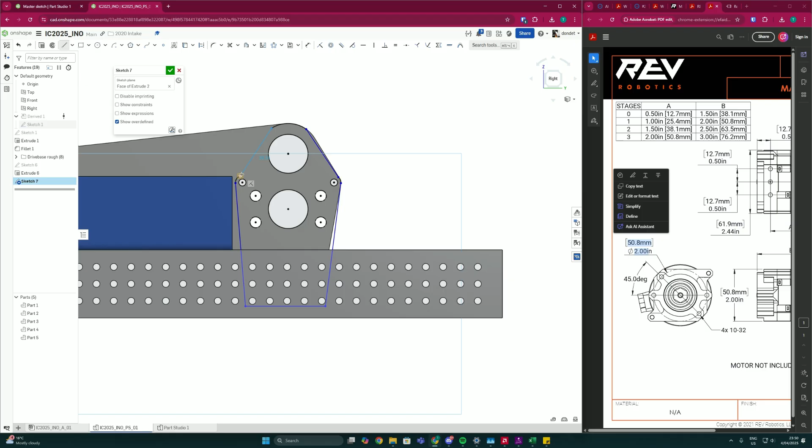I don't know, I guess I could make this, use that by making it coincident, these two lines. Make it kind of symmetrical as well. Q, and then I can go symmetric, shift Q, and mirror line, bang, bang. That should make them symmetric, right?

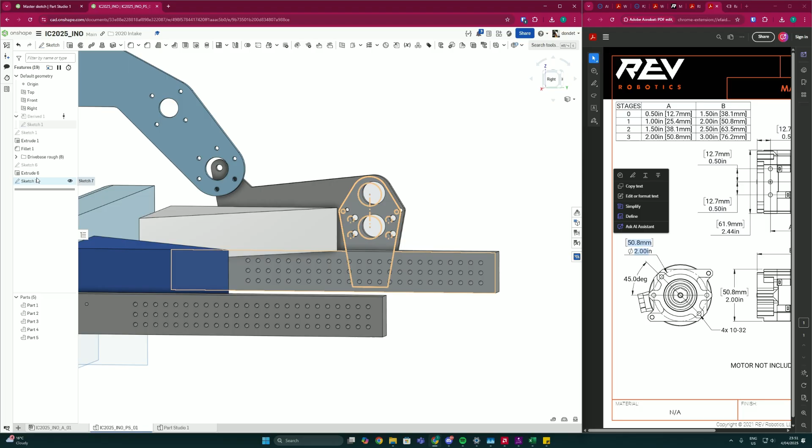Oh wait, I forgot to remember that these holes here need to be mounting holes for the gearbox. So those need to be 10-32, so 5.1, just like that.

So yeah, those are our unpocketed gearbox plates. Don't worry about the holes for now, we'll fix that up later, as well as the shape. We might want to widen this guy out a bit.